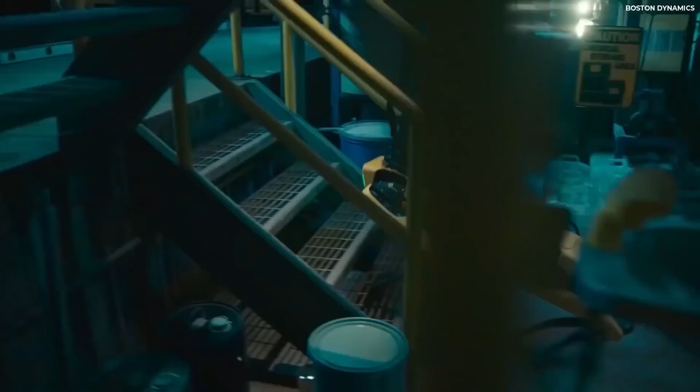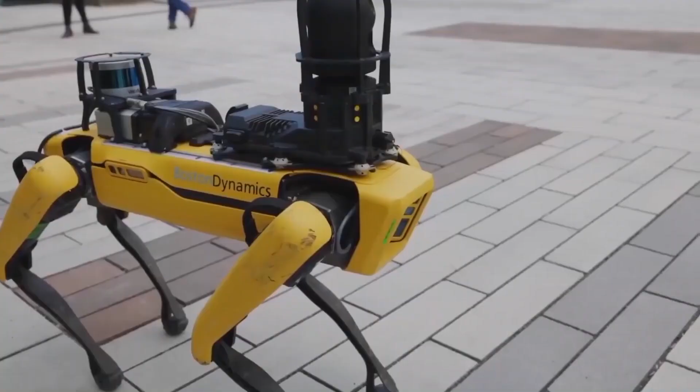In fact, the accomplishments of Boston Dynamics resemble the opening credits of a science fiction film. Beginning with the cumbersome Big Dog, a quadruped robot made for the military, the business has witnessed each new generation of robots relentlessly outperform the previous. Their announcements can occasionally make you feel more uneasy than impressed. What was formerly only a matter of hypothesis is now regularly transported from Boston Dynamics factories.

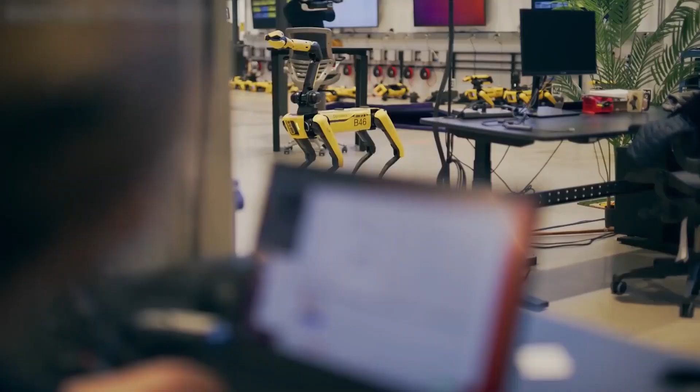The robot's similarity to their human creators gets closer and closer with time. In this video, we'll look in depth at their expanding super robot army and examine the startling rise of this groundbreaking robotics company. Since Big Dog, Boston Dynamics has gone a long way.

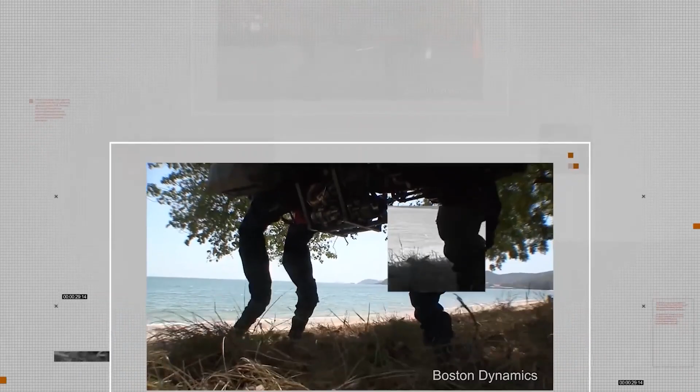What was once the most ambitious legged robot in the world today appears awkward and unprepared by comparison to its offspring. Although the business frequently generates headlines throughout the world, its 'Do You Love Me' video was the one that really went viral.

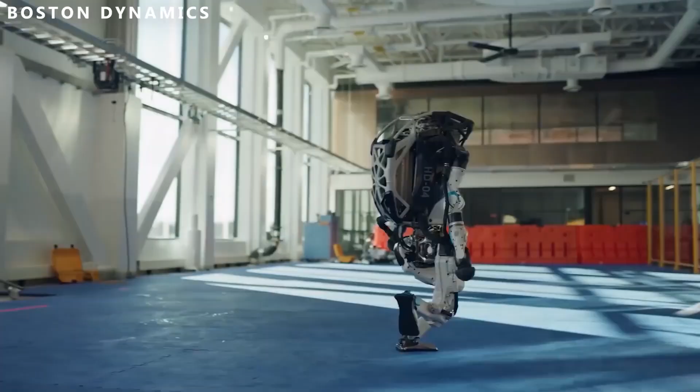The future of robotics was unveiled at only 2 minutes and 55 seconds. Robots perform flips, dances, spins, and jumps. Additionally, they did it in rhythm with the music. Some people thought the show was a little too impressive and called the advertising video a CGI stunt, but it was 100% real. The robots were really that good.

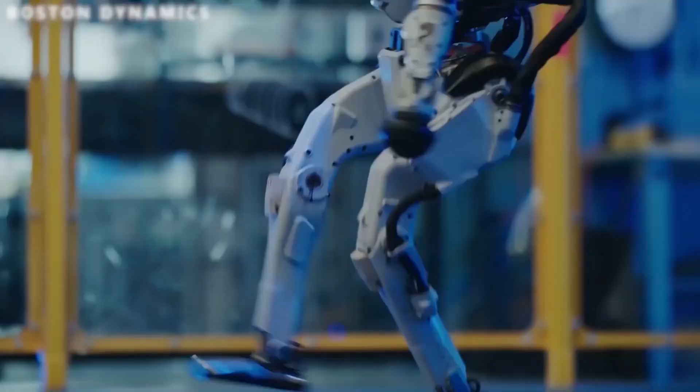Look at this family, or should I say super army of robots. Spot, a direct descendant of Big Dog, comes first. Spot is as graceful as it's accurate, in contrast to its grandfather.

Spot can move across practically any terrain with ease and incredible mobility. It's ideal for jobs requiring routine inspection and data collection. Plus, the entire process can be automated, which is much better.

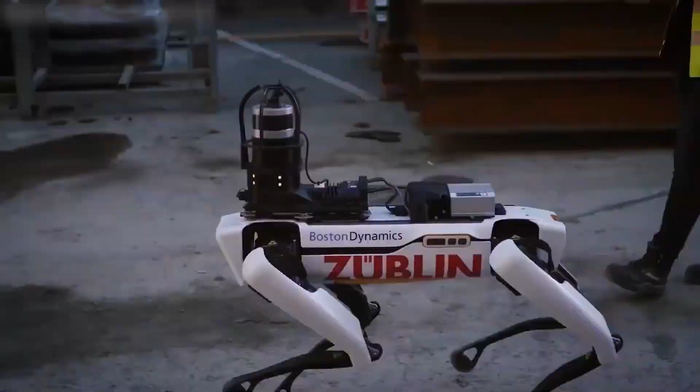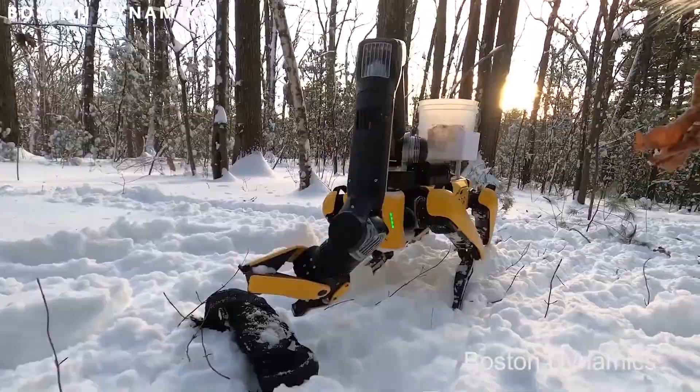A robotic arm can be added to Spot as well. It has a 4K camera and an LED light so it can examine an object before picking it up. In other words, Spot will open the door and leave by itself if it wants to go for a stroll.

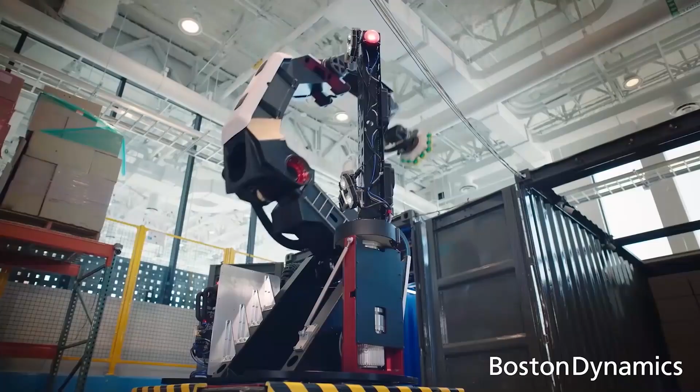The powerful Stretch is the next opponent. Stretch was created for manufacturing labor and has the ability to assemble and unload pallets. Despite its enormous size, it's no less graceful and can carry its weight around a warehouse or factory with ease. This makes it more adaptable in its function and eliminates the requirement for fixed infrastructure.

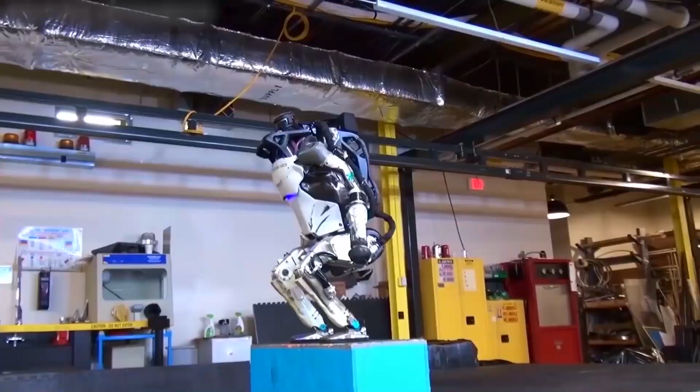Of course, the most sophisticated humanoid robot in the world, Atlas, who can backflip, steals the show. The building has received significant improvements since it was first revealed in 2013.

A 1-year-old youngster can hardly walk, said DARPA program manager Gil Pratt when comparing Atlas to a child at the time. This is where we are right now, a 1-year-old child who falls down a lot. After over 10 years, Atlas is finally fully operational.

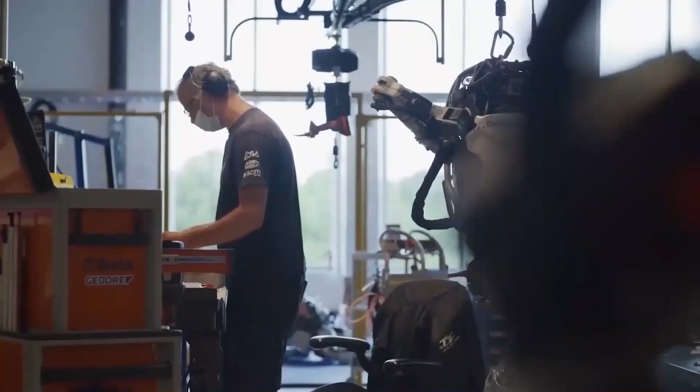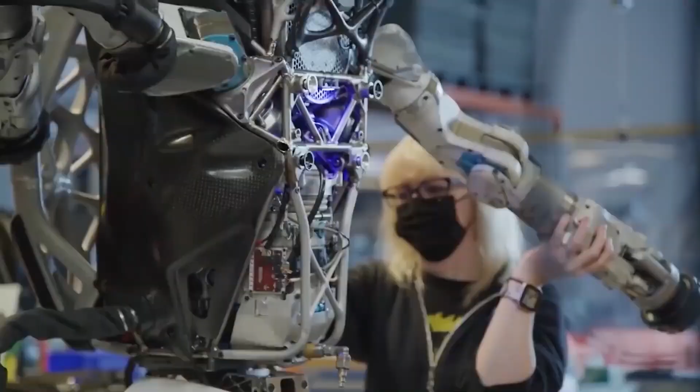The 190-pound robot, which stands 5 feet tall, has 28 hydraulic joints. It can travel at a top speed of 2.5 meters a second and uses sophisticated algorithms to navigate a variety of difficult scenarios. The Boston Dynamics team used behavior libraries to help construct complex routines and more effectively achieve trajectory optimization in order to achieve such exact mobility.

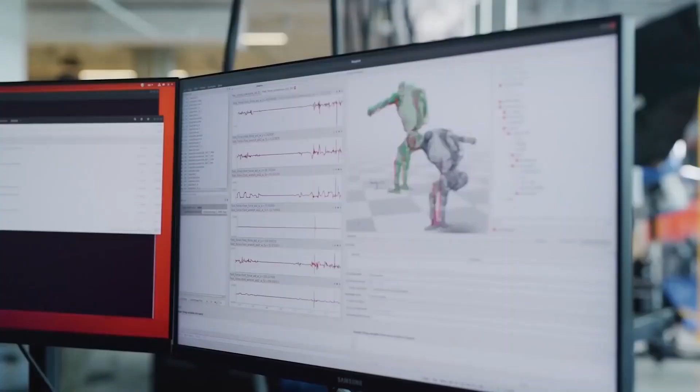This huge army of robots is an outstanding accomplishment all around. What does this mean for us, though? Boston Dynamics frequently wants to highlight how amiable its robot family is. In their ideal future, robots serve as our friendly companions rather than our oppressive overlords.

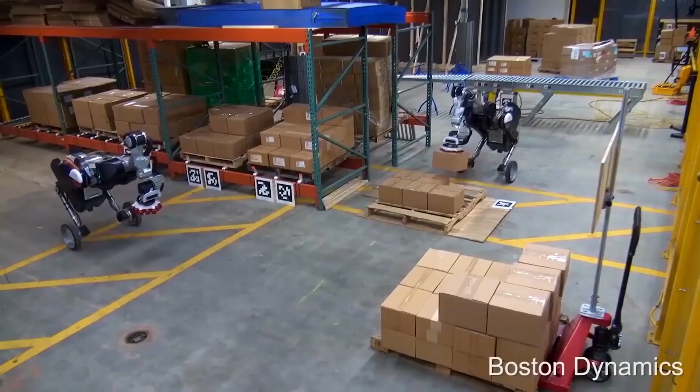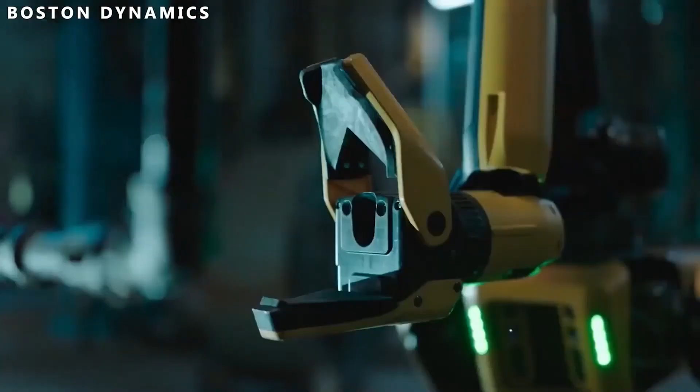It's no coincidence that one of their robots, named Spot, acts like a dog. In fact, the toughness of many of these robots is part of their appeal. They can perform the riskiest tasks that you would prefer not to assign to people. Some of their robots' main uses include examining construction sites and monitoring electricity cables in dangerous and extreme areas.

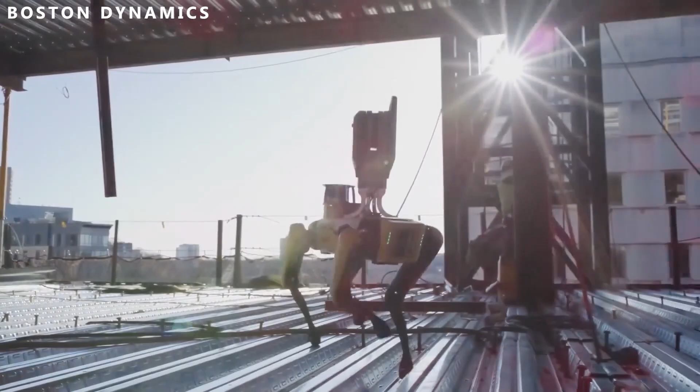This, however, is probably just another astute PR move. Robots and intelligent algorithms are predicted to eat up a large portion of the labor market in the early 21st century, according to experts. Self-driving cars will quickly displace large numbers of humans in the distribution and transport sectors, from warehouse trolleys to enormous trucks.

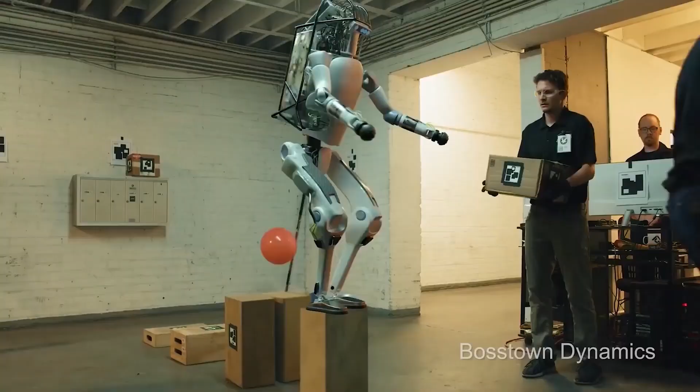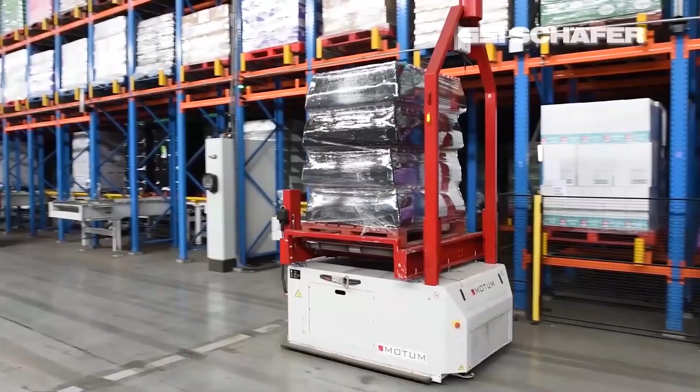No obvious barrier prevents humanoid or quadruped robots from performing similarly in the security or construction sectors. Robots might end up ruling the world through convenience rather than conquest. The Massachusetts-based business is eager to deny these allegations. There is a darker side to all of this despite the good PR and dancing robots.

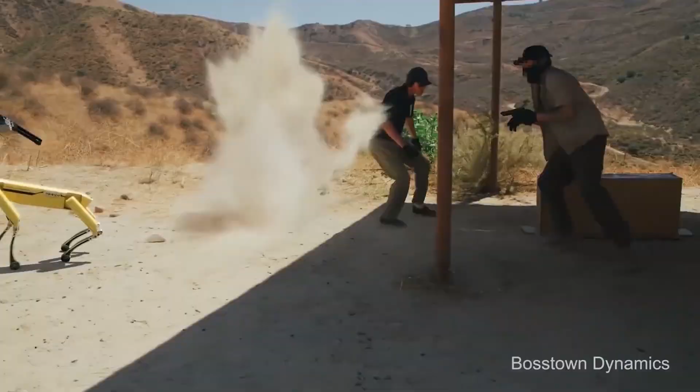The company's initial concentration was mostly on the military, producing essentially artificial pack animals for soldiers. It's not difficult to see Atlas as a robotic super soldier without human frailties who never needs to eat, sleep, or drink. But these soldiers would also be devoid of human compassion and morality.

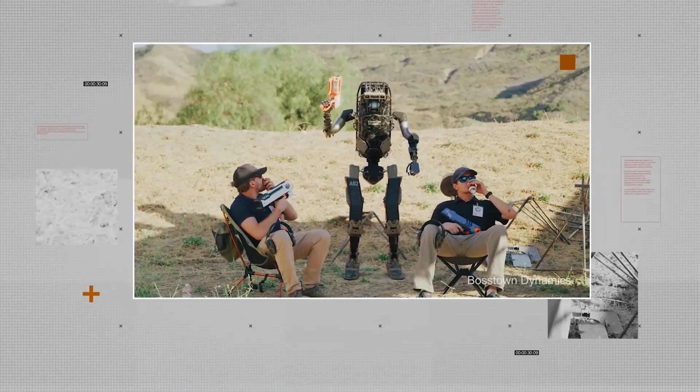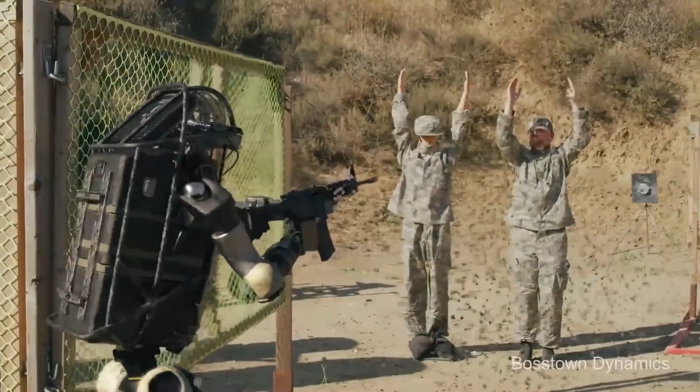However, it should be noted that Boston Dynamics is adamantly opposed to turning their devices into weapons. However, other manufacturers are significantly less hesitant. In one imposing demonstration, US company Ghost Robotics included a quadrupedal robot with a bespoke rifle on its back. The US military is currently testing Ghost's four-legged robots, opening the door for future robotic recruits.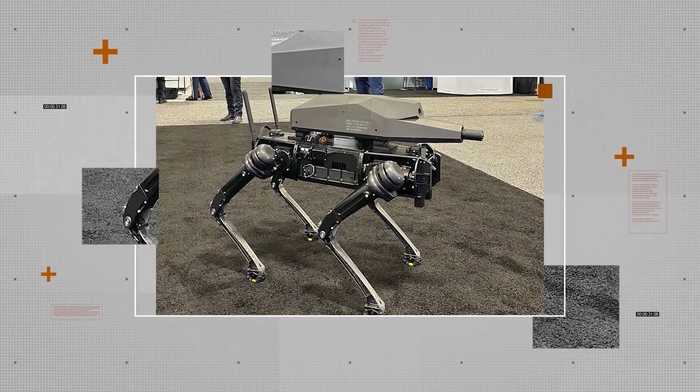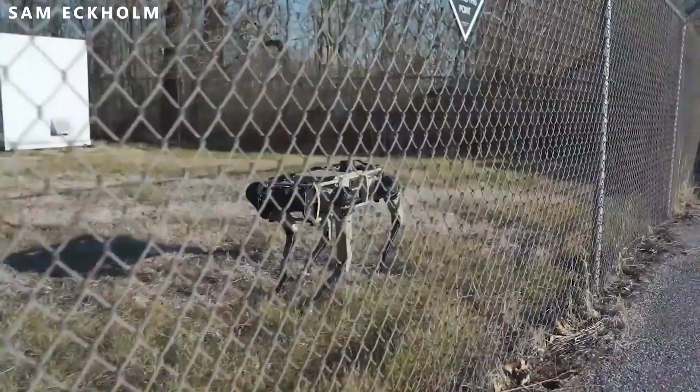It has prompted some organizations to demand a blanket ban on robotic soldiers and other military equipment. It's unclear whether these lethal autonomous weapon systems, or LAWS as they're referred to in the lingo, will ever be used on a battlefield. But if Boston Dynamics' technological advancements are any indication, it won't be long until robots take over human lives.

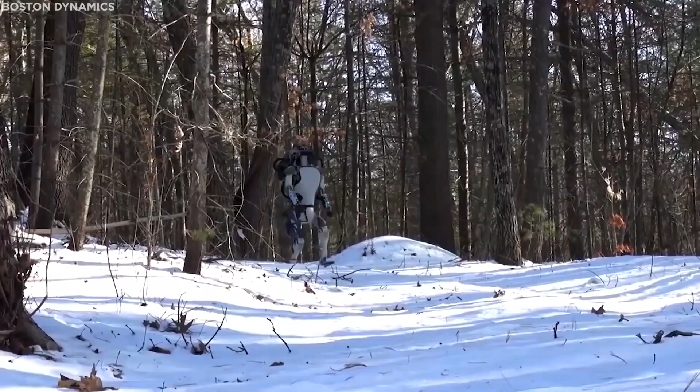Future technologies will probably be hybrid. Robots will replace humans in some of the most hazardous and laborious domestic duties. The biggest change in tech usage since the internet's inception will result from this. But sooner or later, robots will undoubtedly also take part in warfare, even if it doesn't resemble Arnold Schwarzenegger's Terminator in every way.

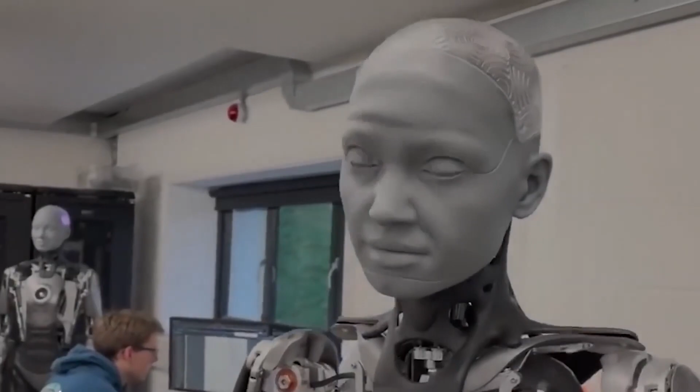But what do you think? Are Boston Dynamics' family of robots as benign as they are brilliant? Or are we creating a new robot ruling class as we go? Tell us in the comment section below.